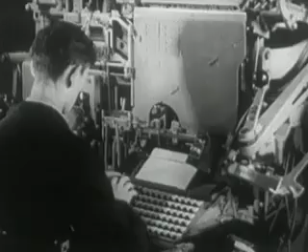The need to read, which stirs the very souls of men, is more evident in the present era of progress than ever before. Publishers, bookstores, and newsstands pour out thousands of books, magazines, and newspapers every day to inform, instruct, and amuse.

The greater part of these printed materials are made possible by various types of mechanical typesetting machines, which set type up in lines cast from molten metal. First introduced at the close of the last century, they are now the most widely used.

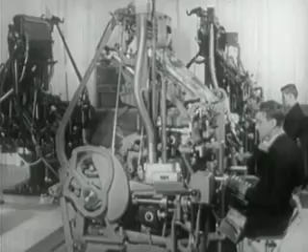Automatic typesetting of complete lines is performed by the Intertype and Linotype machines, which are essentially the same, except in the vast assortment of models designed to perform the particular needs of various types of special jobs.

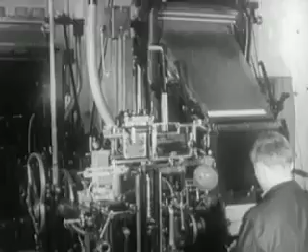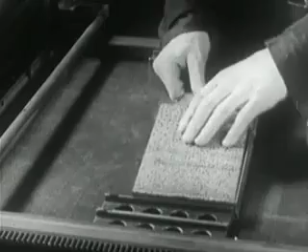These composing machines produce type cast in complete lines or slugs. Here is a slug, or line of type, turned out by these machines. The lines of type, properly arranged, make up the page from which, after inking, the imprint or proof is made.

The function of the keyboard composing machine is to produce the essential materials required to prepare a form for printing. But before going into details, let's first get a general view of the whole picture.

The operator, depressing the keys, releases matrices from the magazine channels. The matrices are delivered to the assembling elevator in the correct sequence.

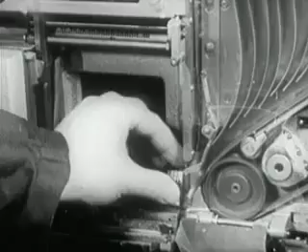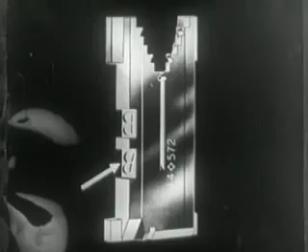Here's a close-up of some mats. You can see the letter that has been punched or engraved, into which the molten type metal is going to be injected. Let's note particularly the two punched characters, one Roman in style and the other italic, and the small lugs and ears which guide the mats through the various passages and assure the alignment of the letters.

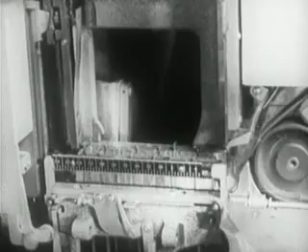Having completed the composition of the line of matrices, the operator sends it over to the casting mechanism. Now the line of matrices is in position for the slug to be cast.

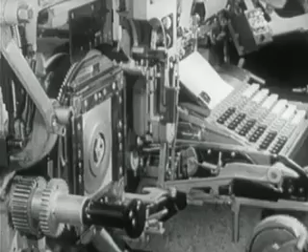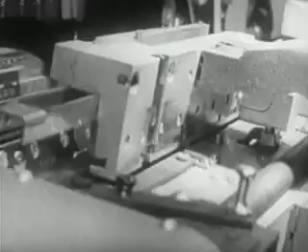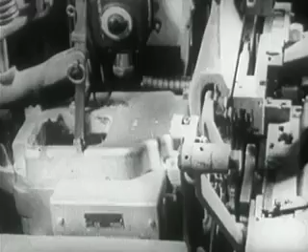Against the opening of this mold, the mats will fit perfectly. Immersed in the crucible, the plunger injects the molten type metal into the mold and against the matrix characters. The metal solidifies, forming letters and symbols in relief.

Then the slugs are carried into position to be ejected from the mold and stacked one after another as they are ejected. Meanwhile, the first elevator rises and the second elevator descends to meet it at the transfer channel.

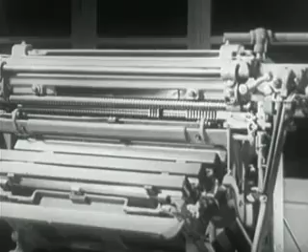The matrices are transferred to the second elevator and raised to the distributor. Here, lifted automatically one at a time, they are returned to their respective channels in the magazine. These circulating matrices will be used over and over as they are needed for composition.

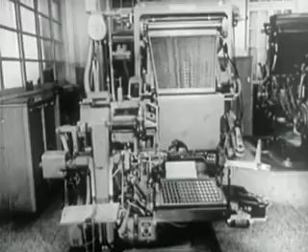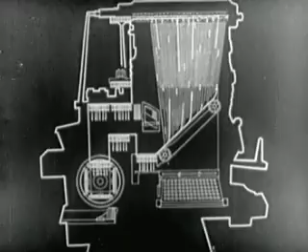The operations necessary to produce a slug or line of type are divided into three groups: composition of the matrix line, casting of the slug, and distribution of the matrices.

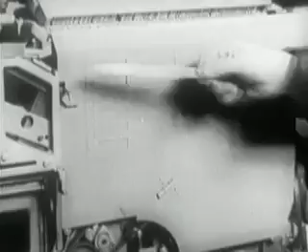Let's now analyze the operations in the first group, composition. Regarding composition, the principal parts are the keyboard, the magazine, the assembler entrance, partitions, the matrix delivery belt, the assembling elevator, and the delivery slide.

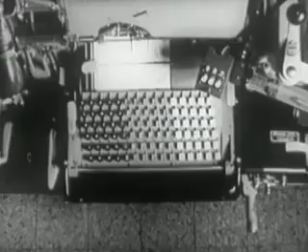The keyboard has 90 keys on 6 rows of 15 each. It is divided into 3 sections. The lowercase letters are at the left, uppercase in similar arrangement at the right. At the center, punctuation marks, numbers, and small caps.

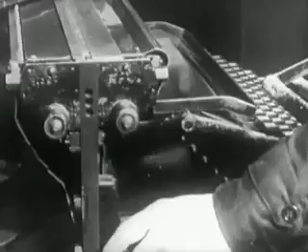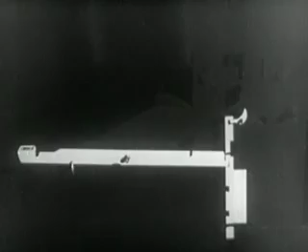Every touch of the key releases the required matrix from the magazine. Now we will examine the internal parts of the keyboard activated by one touch of a key to release a matrix from the magazine. They are the key button, the keyboard lever, the key bar, the trigger, the cam frame, the eccentric cam, the rubber roller, the comb, and the key rod.

Let's observe how the various pieces react to the key. The key moves the lever to which it is joined. This lifts the key bar. In turn, the key bar activates the trigger, whose function it is to support the frame with its corresponding eccentric cam.

The motion of the trigger allows the frame to lower itself so that the cam revolves around the rubber roller, which rotates continuously.

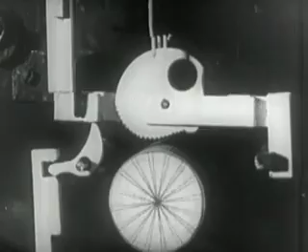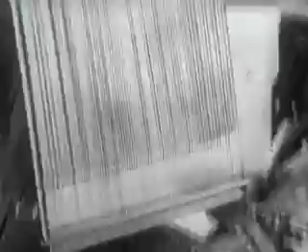The rotation of the cam lifts the end of the frame. This raises the long key rod, which causes the release of the matrix from the magazine. Similarly, we find on every machine, corresponding to the keys, 90 key rods which make up the assembled key rod frame, which is situated behind the assembler entrance and brings the keyboard into play with the magazine.

Here are the upper ends of the key rods, which rock escapements situated in the magazine, thus allowing the mats to be released.

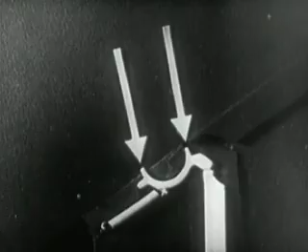Let's study this operation more closely. The upper end of the rod transmits the movement to a half-moon-shaped device called the escapement. The two ends of the escapement are called lugs. Penetrating the magazine, they control the release of the matrices.

The mat in the first row is held up solely by the front lug of the escapement. As the key rod lifts, the front lug of the escapement lowers, releasing the first mat. At the same time, the rear lug is lifted and holds the second matrix.

As the key rod lowers, the spring returns the escapement to a position of rest, thus allowing the second mat to move forward in the place of the one released an instant before. The same operations are repeated at every touch of a key.

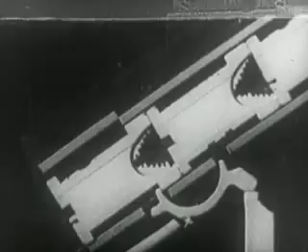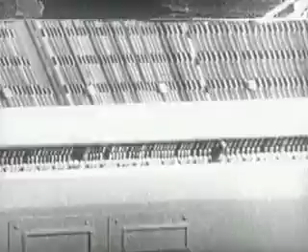The mats that we see come out are arranged in the magazine situated at the upper part of the machine. It rests in a slanted position to facilitate the descent of the mats. It is substantially formed by two trapezoidal plates, one below and one above, which, as in our case, can be made of visilite.

On the inside of the magazine, there are grooves called channels, which support and guide the circulating matrices. The magazine has 90 channels, corresponding to the 90 keys on the keyboard. Every channel contains a maximum of 21 circulating mats, which are sufficient for the normal requirements of composition.

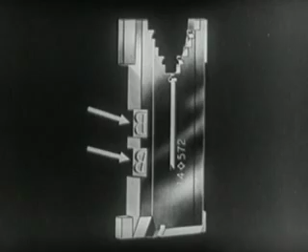Generally, a mat carries two letters, Roman and italic, or Roman and bold. A magazine contains lowercase letters, Roman and italic, controlled by the left section of the keyboard. The uppercase letters, Roman and italics, controlled by the right section. The small caps, numbers, and punctuation marks, controlled by the middle section of the keyboard.

In changing to another type, larger or smaller, the magazine must be changed. Similarly, in going to another series or letter design. It is precisely for this reason that machines are built with a capacity of up to 4 movable magazines, any of which can be replaced with others.

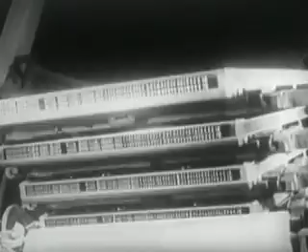The pre-selected magazine is brought into working position with the escapements aligned over the key rods.

The mats released from the magazines are now directed toward the assembling elevator. Now we'll see the whole operation in slow motion. They are guided in their descent by the assembler entrance partitions, which prevent them from turning out of correct position.

The mats fall upon a delivery belt in constant motion, which carries them in correct sequence to the assembling elevator. It takes the same length of time for all matrices to reach the assembling elevator due to the design of the assembler entrance and matrix delivery belt.

Before reaching the assembling elevator, the mats have to pass under a small spring blade called a chute plate, which cuts down its speed so that the rotating star wheel can turn it upright and move it forward against the others in the assembling elevator.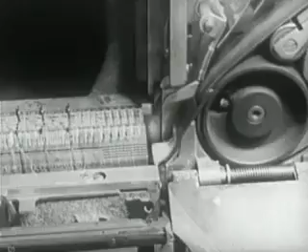At the left, the mats are held upright by a wedge or finger attached to a long horizontal bar called a slide, which travels to the left as fast as the mats arrive.

The assembling elevator consists of a front and a back plate. When fastened together, they form a channel in which the mats can assemble.

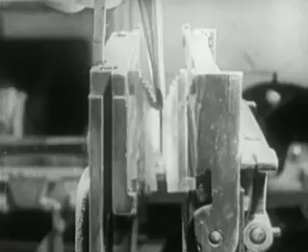These moving levers control the duplex rail. With this device, the mats can assume 2 positions in the assembling elevator. Mats in the first position, Roman, rest on the fixed lower rail. Mats in the second position, italic or boldface, rest on the movable duplex rail. Hence, each mat can present independently to the mold opening either one of the 2 characters.

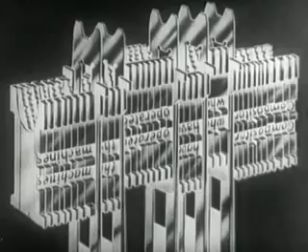Here is a line of matrices which illustrates this principle. For greater convenience, the upper part of the assembling elevator is equipped with a hinged gate.

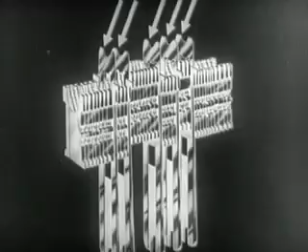A steel wedge known as a spaceband is assembled between one word and the next. The spacebands are released by the key situated at the left of the keyboard. Because of their dimensions, the spacebands cannot fit into the matrix magazine. Therefore, they are stored in a box above the assembling elevator. The parts for releasing the spaceband are similar to those which release the matrices from the magazine.

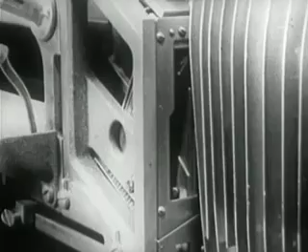The spaceband consists of 2 parts, the tail slide and the small head. Both are wedge-shaped and are held together by a dovetail construction.

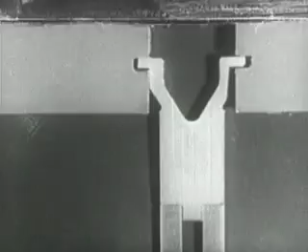The small head is held stationary by lugs in the grooves of the first elevator, so it remains fixed when the corresponding slide rises. In that manner, the expansion of the spaceband is obtained. Whatever the position of the slide, the outside surfaces of the slide and head are always parallel, due to the construction of the parts.

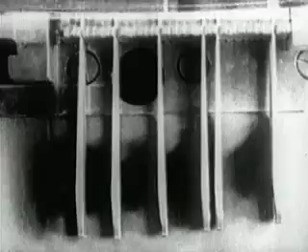The function of the spaceband is to expand or spread out the line to the predetermined length, thereby increasing the space between words evenly. This is called justification.

Having completed the line and checked that the number of spacebands is sufficient for the amount of expansion needed, the operator can send it to be cast.

The transfer is carried out by the delivery slide, constantly held under tension by a spring, and held in place by a small lever which will be released by the raised assembling elevator.

The delivery slide consists of a short fixed finger and a long moving one. They receive the line and carry it through the transfer channel to the first elevator.

At this point, we end the operations of the first group and take up the second, the casting. Note that the casting unit starts operating automatically as each matrix line is delivered. It takes from 5 to 10 seconds for a complete cycle, depending upon the speed of assembly.

All the while, the operator continues to compose.

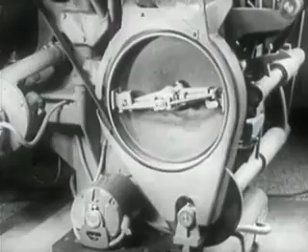Let's go into the explanation of this group. A 1/2 horsepower motor supplies the drive transmitted by a large pulley through a transmission gear and belt.

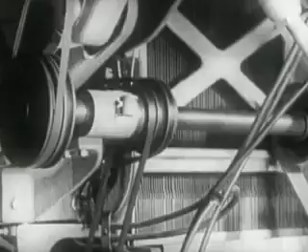Many of the basic mechanical actions of the machine depend on the 10 large eccentric cams situated at the rear. With a series of springs, they make up a completely automatic setup. These eccentric cams are synchronized to rotate together, since they are all mounted on the same shaft.

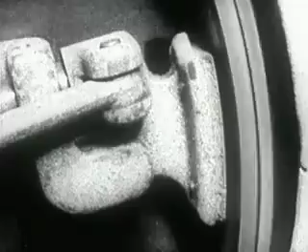The cams begin to rotate as soon as the delivery slide carries the matrix line into the first elevator jaw. This releases a stop in the delivery cam at the rear of the machine. The 2 friction shoes of the driving clutch are then pressed against the inside of the driving pulley, thus causing the driving shaft to rotate the cams.

At the opposite end, this shaft has a pinion that transmits the movement to the large driving gear on the cam shaft. The cams are thus made to rotate. Every complete turn of the cam shaft corresponds to the casting of a slug. Every eccentric cam has a specific function which it carries on during its cycle, quite independently of the others.

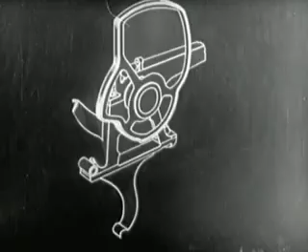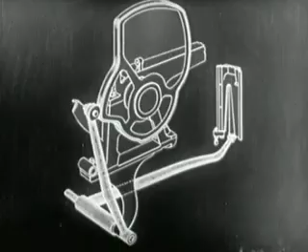To get an idea of how the cams work, let's observe the first of the series that controls the first elevator. The first cam, by means of the vertical lever on a pivotal mount, and the long horizontal lever which runs through the base of the machine, transmits the movement of the first elevator. Every turn of the cam corresponds to a determined movement of the elevator, as we see in the close-up animation.

The cam makes the elevator descend to the vice cap and holds it in casting position. The cam next raises the first elevator to the intermediate channel for the transfer of the mats. Then the cam permits the elevator to return to normal position.

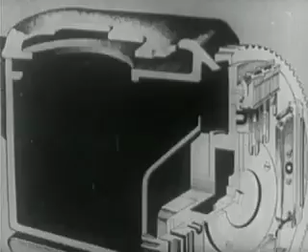Here are the other parts which, with the cams, make up the casting: the vice frame, the mold disc, and the metal pot. This is made of an outside casing or jacket and provides thermal insulation to the crucible that contains the molten type metal.

Between the casing and the crucible, there is a cavity stuffed with asbestos. The plunger is in the well of the crucible, at the front of which there is a mouthpiece.

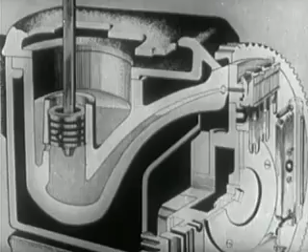When the plunger descends, it drives molten metal into the mold against the matrix line, thus casting a slug with the letters in relief. The type metal solidifies almost instantly. Then the plunger rises again to normal position and sucks molten metal into the well to replace what was used up in the previous casting.

Automatic feeding regulates the descent of the metal pig to maintain a constant level of the molten metal in the pot.

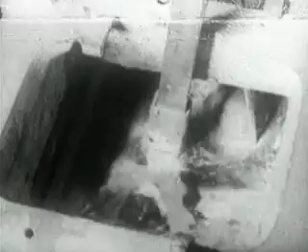This metal is a triple alloy composed of lead, 85%, antimony, 11%, tin, 4%. The temperature for casting, approximately 285 degrees centigrade, is kept constant by a thermostat.

The metal pot is always kept heated so that it is ready to cast slugs each time the mouthpiece moves forward and locks against the back of the mold.

The mold is mounted on a rotating disc. The disc has teeth which are geared to a pinion activated by two sections of gears, so that it rotates at intervals. Normally, the wheel carries 4 molds for casting.

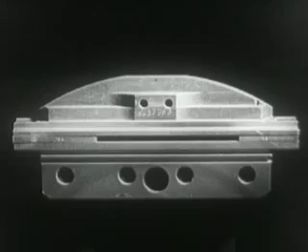The mold is made up of the following parts: the body, fastened to the disc with 4 screws, and the cap. Between the body and the cap are inserted, depending upon production needs, the precision liners, constant length at the right and variable length at the left. The liners determine the length and thickness of the slug. Therefore, the purpose of the mold, as the word shows, is to establish the dimensions of the lead slug, which may vary in length and in thickness.

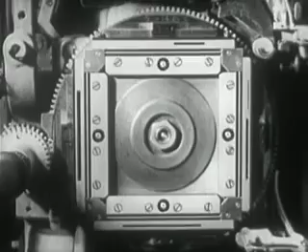To avoid constantly changing the liners, there are usually 4 molds mounted on the disc. Naturally, only one of these is pre-selected for a given job and must be in vertical position at the right. Behind this mold is situated the ejector, whose function it is to expel the slug at the right moment.

To avoid overheating of the mold, in certain models water is made to circulate on the inside of the disc, as we can see in this diagram, while in others the same effect is obtained by an air blower.

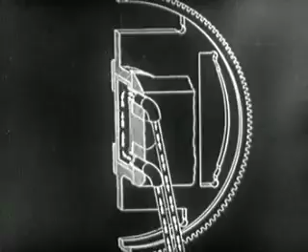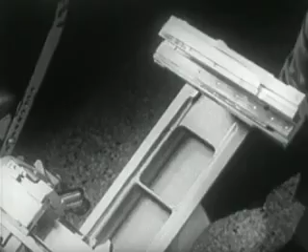In front of the mold disc there is the vise frame that can be opened when necessary. Important parts of the vise are the first elevator, the vise jaws, the justification block, the knife block, and knives.

The first elevator jaw is so arranged as to receive the line of matrices from the delivery slide and to lower the line between the 2 vise jaws.

The jaw at the right is fixed, while the one at the left is movable. The latter, set in advance, determines where the left end of the matrix line will be positioned with respect to the mold opening. The justification block, driving the spaceband wedges upward, spreads out the line of matrices.

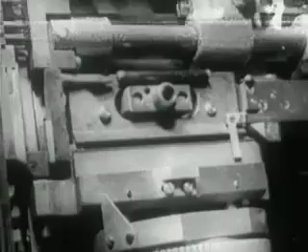2 vertical knives trim the sides of the slug. One knife is movable and the other stationary. The movable one is adjustable in advance according to the type size called for.

After pointing out many parts involved in casting, it will now be easy to review the operations involved in the casting of a new slug.

The elevator lowers the matrix line between the vise jaws. In the meantime, the mold disc makes a quarter turn to put the mold in position for casting. It advances slowly to engage the lugs of the mats in the alignment grooves of the mold body.

The justification block raises the wedges of the spacebands, which expand themselves between the words and spread out the line. The metal pot advances against the mold, locking the mouthpiece tightly against the mold and the mats.

This is the instant in which the plunger injects the molten type metal into the mold under pressure, casting the slug with the letters in relief.

The plunger rises, the pot and the disc retract. The justification block comes down.

The mold disc starts its 3/4 turn, during which a knife, located behind the disc, trims the base of the slug, bringing it to exact printing height.

Now the ejector blade forces the slug between the 2 vertical knives, which trim it on both sides. Then it falls into the galley.

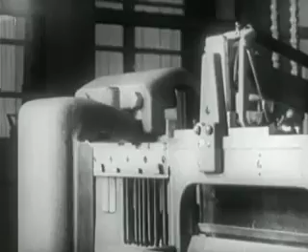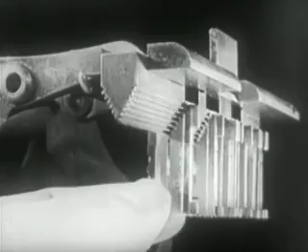The transfer finger, moving the mats toward the right, forces them from the first to the second elevator. The mats glide onto the second elevator bar and remain there, suspended by their teeth.

As soon as the transfer has been completed, the elevators return immediately to their normal position. The spacebands, which do not have teeth, remain in the transfer channel. During the second closing of the transfer levers, the spaceband pawl engages the spacebands and returns them to the box.

The distributor shifter retracts, allowing the second elevator to seat at the distributor. Then the shifter pushes the mats into the distributor box.

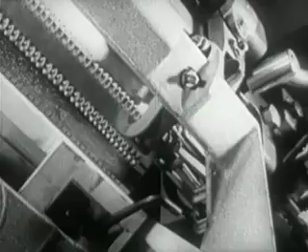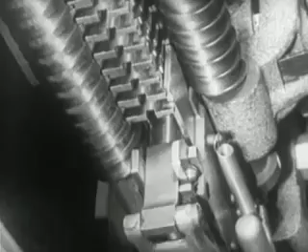Here the mats are raised, one by one, by the matrix lift. The slight lift is sufficient to insert the mats into the coils of the 3 helicoidal screws. It should be noted that it is not the function of these screws to keep the mats suspended, but only to push them ahead. The 2 upper screws engage the ears of the matrix, while the lower one engages the lower front lug.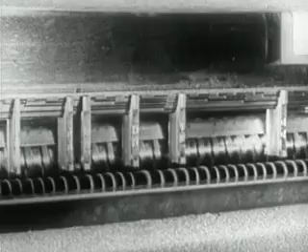To keep the mats suspended up to the moment of their release into the magazine is the function of the distributor, on which they glide, suspended by their combination teeth. Every mat is therefore supported on the distributor bar by means of its teeth, as we can see here. For example, the mat of the letter O will remain suspended on the bar with the second and third tooth combinations. This other one, corresponding to the letter N, will remain suspended with the fourth tooth combination.

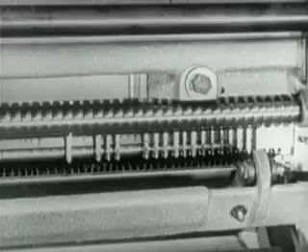When the distributor bar fails to supply the required combination, the mat, no longer having support, drops into the magazine. Therefore, for the 90 magazine channels, there are 90 different tooth combinations, and consequently an equal number of combinations along the length of the distributor bar. The mats, detaching themselves from the bar, return to their respective channels in the magazine.

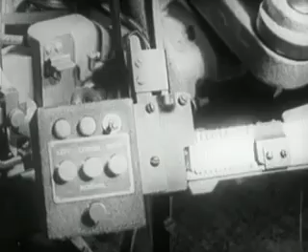Those mats which do not run in the magazine have all of their teeth, so that they run the entire length of the distributor and drop into a chute which guides them into a stacker near the keyboard, where the operator can select them and insert them as needed in the assembling elevator.

Let's now review the entire procedure at a glance. The manipulation of the keys releases the mats from the magazine. They drop between the assembly entrance partitions and are delivered to the assembling elevator to form the line.

The finished line is sent on to the caster. The mold and the metal pot advance, and the plunger makes the cast. The pot and the mold withdraw. Then the first elevator rises to transfer the mats to the second elevator bar. At the same time, the slug, trimmed at the base and sides, is ejected into the galley.

The mats go to the distributor. Moved by the helicoidal screws, they run along the length of the distributor bars so that, with the procedure already noted, they fall into the respective channels of the magazine, ready for use in succeeding lines.

As in all industries, technical progress has achieved notable progress in mechanical composition. Here's a sensational one. This machine has been made completely automatic, so that it is not necessary to have an operator touch the keys. The keys are actuated by a tape, perforated in code.

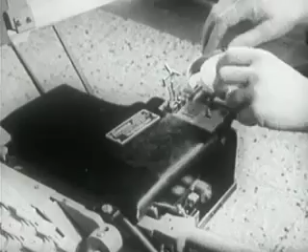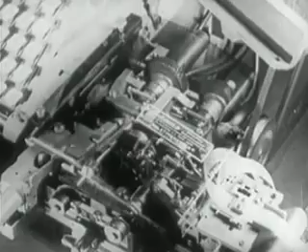Thus perforated, the ribbon is applied to the so-called automatic operator, situated at the right of the keyboard of the composing machine. The reading of the perforated tape is accomplished by the automatic operator, a true jewel of engineering, usually with 6 small feelers in series with the perforations.

It is interesting to observe how only the small feelers which go through the perforations in the tape transmit the movement to the keys of the composing machine, which translates the codes without error at a top speed of 20,000 letters an hour. Note that the raising of the assembling elevator is also automatic.

This is the performance of one of the numerous composing machines which, with increasing rhythm, accomplish the important task of preparing composition for newspapers, periodicals, books, and printing of all kinds, in all European languages and in some Oriental ones as well.